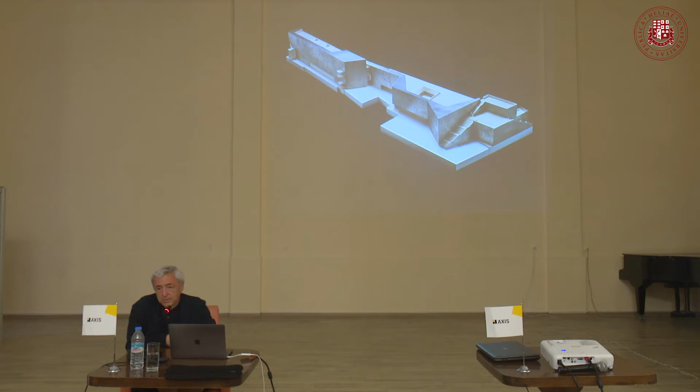How to develop the skin? We asked two very good friends and artists from the Basque country, Ferrán and Otero, to develop together the texture of the exterior facade. The facade came from walking with them through the landscape of the border of the Basque country on San Sebastian, where you see these images, for example, these stones that after centuries have been eroded by the water, by the wind, and sometimes the green, as you see, is coming from inside.

So we designed a whole facade that is based on a series of modules. These modules you see there are 1 meter 80 times 60 centimeters, like 3 squares. And we developed a series of different perforations so that in some cases the green can come through the perforations in a not very different way from the natural situation that happens there, because the whole project is dealing with this idea of the limit between what is artificial and what's natural.

So the project, once it was finished, as you see in the image, not only refers to this mountain, it refers also to the military constructions of the 17th century over there. And when you are coming closer, then you understand that this very sculptural image gets a different texture simply because of these systems of perforations.

We have 4 different types of perforations with more and less perforations, and they can be organized in different positions, rotating the building in different situations.

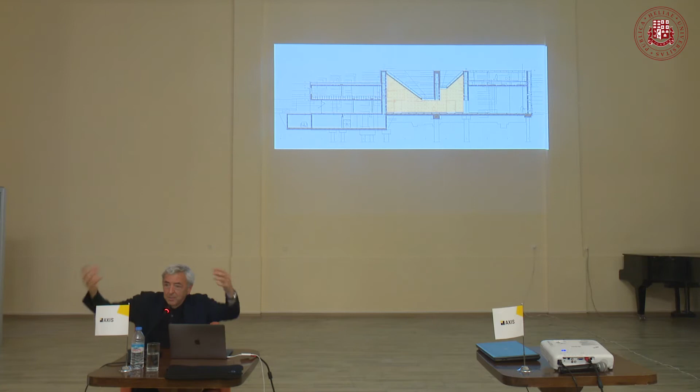If you look at the section of the building, the section expresses the whole idea: this sort of inverted space that we built in the working models we did in our office so often.

This recalls the muqarnas and masharabiyas of Arab art. This was the model we won the competition with. This was a model we developed later, in which the whole facade becomes a special treatment for use by the artists, the video artists inside.

The building was built rather quickly, and the roof, as I mentioned before, is a key element that expresses the section, the natural light, and therefore the space inside.

When you see the building from the other side of the river Guadalquivir, you see a very horizontal building, and when you see it from behind, you see the space used by the artists in residence. But the whole building is conceived inside. Outside is this white building.

GRC, glass reinforced concrete. But inside, the whole building is like a factory, built entirely in concrete, expressing this idea of an inverted, almost very large-scale muqarnas.

They create these hexagonal spaces that can be connected one with another, which are the exhibition spaces, sometimes very compressed, sometimes very expanded. A single simple plan creates many different situations.

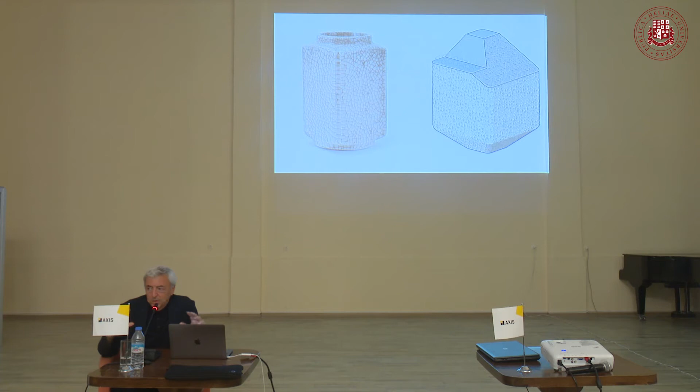So we started with this image, a base from one of these dynasties in Ming China, a beautiful ceramic element. And we thought, the only way one could eventually control a building so far away, so much bigger than we are used to, would be to define one single element. This single element would be clad with this white ceramic, like the old porcelain of China.

And then we would repeat this element in 9 cubes with different roofs, and the roof becomes a theme, creating all these variations that appear different but at the end come from the single element. In other words, if we are able to define and detail very much one of these large cubes, we would eventually be able to control the whole building.

It's a little bit more than 9 cubes, because when you see the section, in China things are large, and we needed to somehow transmit the public space outside to the inside. So the key idea is that the center cubes are floating. Actually nothing floats, but it can be solved with engineering solutions. It's really like 3 very large bridges, 60 meters long, hanging and creating a complete open space on the ground floor.

So when you see the building in process, the plan is like a container. In this case the interior is going to be a science museum with no light, done by a Chinese company, not by us. The roof is the only element that creates this variation with gardens on top of it. The ground floor becomes this very large common space connecting exterior and interior, whereas the outside becomes this expression of the building, a variation of this combinatorial thinking.

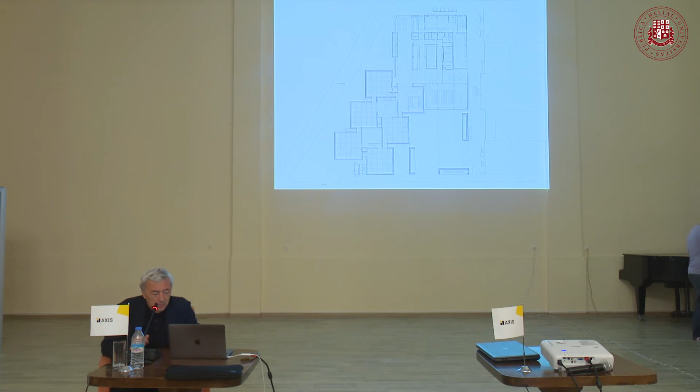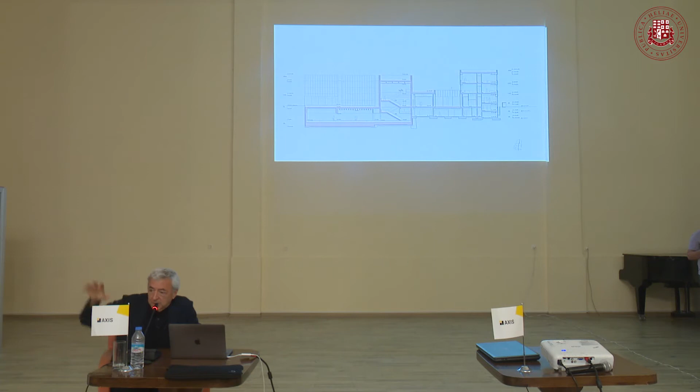The extension was proposed by us simply by going below ground - a theme that comes back in our work in many cases. We extended the museum for temporary exhibitions below ground. Only some elements appear outside to bring in light, reorganize the spaces, and create a new garden. This project just started construction, extending the whole area below ground. The section shows a new stair connecting to the exhibition spaces.

Building in Germany is different from building in Spain. In Spain there is a lot of freedom about proposing things; in Germany, not so much, but on the other hand they achieve extreme quality. For example, the roof will be exposed concrete for these exhibition spaces, with new connection elements, skylights, and new gardens outside bringing light into the space below. I bring this up for the strange connection projects sometimes have - every project is, in a way, a mirror of another one.

And also to show our attitude, in some cases expressing a very strong architectural position, but in others taking a step backwards because there is already an existing historical or more recent building, and therefore simply adding what we think is necessary and keeping the rest of the building as it was.

A very recent competition we won in Madrid. You see that we are architects from Madrid, but we don't have that much work there—our work is in many other places. But now we won a competition for a very interesting museum, a very recent one, the Museo Sorolla. Sorolla is this very great and recognized painter of the century in Spain.

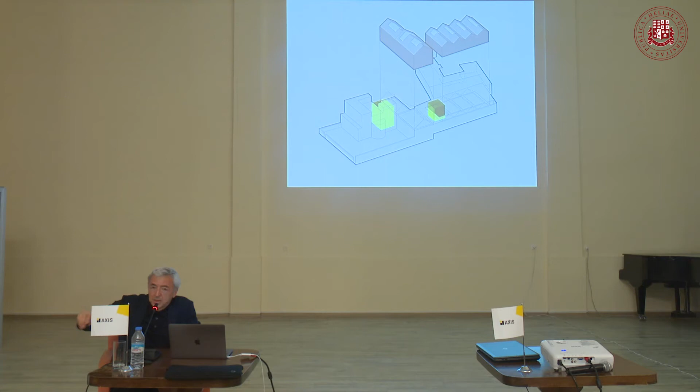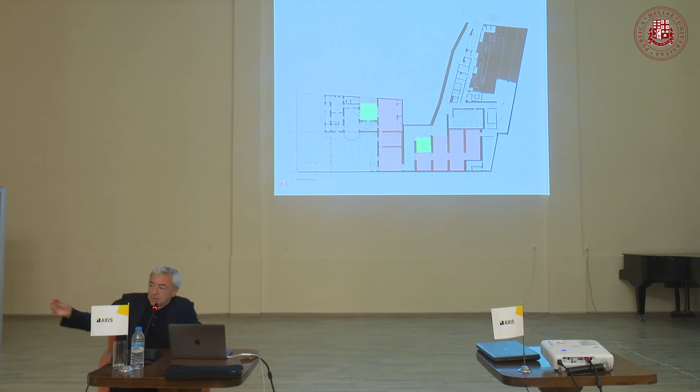We will have another small patio and a sequence of ateliers, so to say, which are the temporary exhibitions. So you see here the extension area, the existing patio and the new one, and the existing atelier that is going to be kept as it is and restored, and the new sequence of exhibition spaces that, in section, somehow recall this idea that the only thing we had to do is try to read what's there and extend the concept in a way.

I show it here because it's very recent—we only started with the basic project. This is the working models that we always use. There's a view of the building that again takes this idea of taking a step backwards, because the protagonist is not our building. The protagonist is the house of Sorolla.

There will be only a new entrance from this ex-garage that now is going to be the entrance to the public area. And the new extension is going to have, of course, this sequence of more neutral spaces that nevertheless have the shape of this atelier that for us recalls this image, the thought that started the project.

Let me go quickly through many ways of acting on a different building that nevertheless has to do with this roof-type conception of architecture. We won a competition in France one year ago—the first time we were working there. Every country is different, not only in culture, but also in the way they work in architecture, in construction, etc.

We entered this competition for a sports center and cultural center of a small town called Reignier, which is only about 20 kilometers away from Geneva, so very close to Switzerland. In this town, people work in Switzerland where they make more money, but they live in France, which is less expensive.

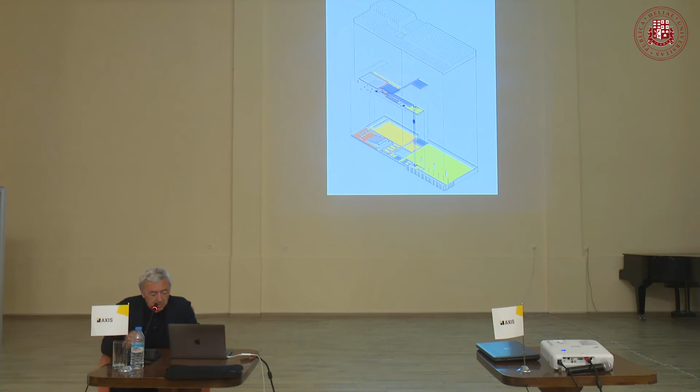We won the competition with a very simple scheme, making the plan rational and logical, organized into the spaces needed within a limited budget. But the roof was the key question, not only because it recalls the idea of the Alps behind it, but because the different areas of the roof express the different parts of the program.

Looking at the plan, it's very straightforward, with conditions of natural light inside, and the organization of the tennis courts, sports area, and auditorium on one side — a very functional, logical plan.

The section, nevertheless, expresses a sort of zigzag of elements that are very compressed or very expanded, organizing the interior spaces. Moreover, they create the idea that this very simple building holds all the power of the architectural idea in the roof, which somehow recalls the presence of the Alps behind.

All the projects are connected for a strange reason I don't know. This image of the Alps was, more or less in parallel the same year, related to the invitation we received for a very interesting competition: the museum and exhibition center for Montblanc.

Montblanc, many of you probably know, is the very famous pen company. I was convinced Montblanc was French or Swiss, but no — Montblanc is German, like many other technical things. Montblanc is a company founded over 100 years ago in Hamburg.

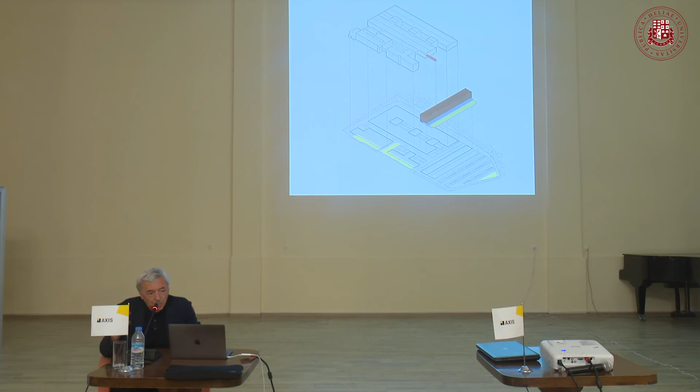Why is it long, thin, and black—longitudinal? Because if you buy one of these elements, or receive it as a present from a friend, family, or wife, you get the case. The case is always black in Mont Blanc. When you open the case, you find the object. And if you're even more curious and open the object, you find the exact precision and beauty of the elegant engineering inside.

So that was the whole idea we presented. We said, okay, we're going to do a project, a building that is a case. This case is black because it's your color. When you open it, there will be a section that is a complex building. This simplicity outside makes a complex section inside that recalls the idea we wanted to tell.

When you see the plans, they're rather simple and logical, like in many of our projects. The ground floor is the reception area, a shop, a cafeteria and restaurant, etc. The intermediate floor is all exhibition of three different types: an exhibition of their products—their pens, the history of the company—on the left side an art exhibition because they own a contemporary art renowned collection, and on the right, temporary exhibitions or whatever they're interested in. The upper floor is for a sort of academy, presentation of products, etc.

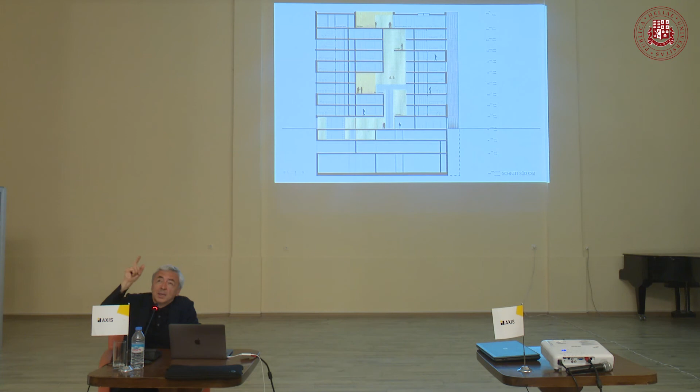So in other words, we were working with this idea of the void. Imagine this yellow element carving the space inside, creating a lobby 30 meters high.

Which, after the competition developed in the models that you see here, is like having a really dramatic space inside, compressed and expanded, whereas the rest of the building are these rooms that the building has.

I show these images because, of course, I'm an architect from Spain, and I think being an architect in Spain and a contemporary architect, it's difficult not to be somehow influenced by this great artist, Chillida. Chillida is one of the greatest sculptors of the late 20th century in Spain, and he always worked with this area of the space in between, the carving spaces.

So this became the idea that we developed eventually, as you see in the project after winning it. This was still the competition images, and now the project in development and in detail.

The project is being detailed to the extreme in the German system, down to the last detail before starting construction. At the end or beginning of next year, construction will start, and apparently everything should be very quick.

But for us it was important to connect it to this idea that sometimes these images I refer to come from the site, the place, and sometimes they come from my own or our personal memory and background. Working with this carving and folding, which is a way I teach in the university in Berlin to first year students, because there are manual actions that refer to thoughts, is connected also to this building in Bristol.

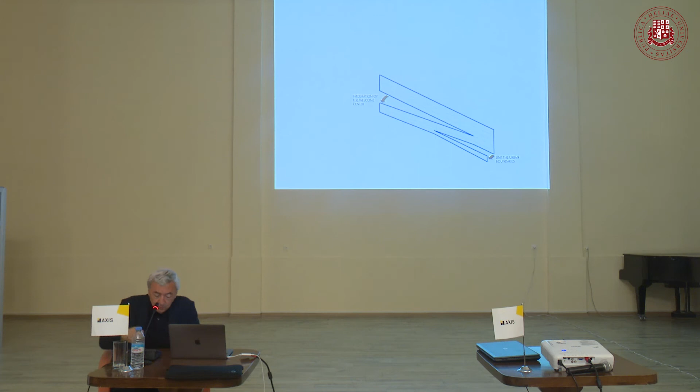Actually, it has to be somehow updated, but the idea of the whole rhythm should be kept. So we went with this idea that relates to folding with material. This is the facade. They asked us to do a surface, but what if we cut the facade, we extend it, and we adapt to these different additions and elements that happen to be there.

And we also created a new small public space, which is a screen area that separates it from this very traffic-heavy street in front of it. So we want to show this model that you see, which is a metal element.

The project became a very technical question about taking away the asbestos, cladding with this metal element, providing new insulation, changing the windows. So a very technical process in a different system again, which is England, with a local architect collaborating with us, so that the building that was like this in the 60s, was like this just before.

Eventually, it became the project in which we simply added this veil to a building. For us, also a rather unusual situation, because we treat only one part of the building, that also plays with the illumination during the night and gives sort of variations of this almost musical score.

It looks like that is not our invention. It simply was there in the building of the 1960s, simply by separating it at some point in order to create different rhythms, and it creates this very small but nevertheless important public space that separates and helps the people that go there to the space.